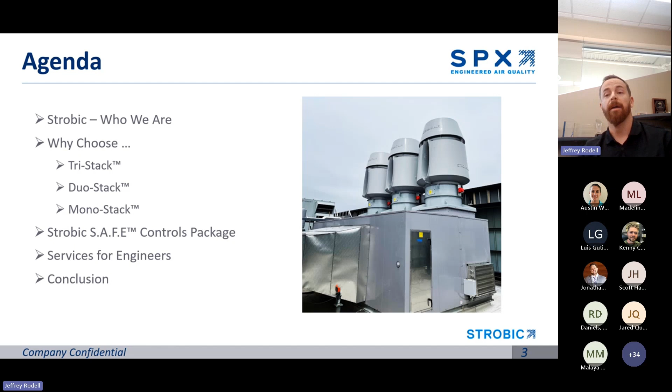Keep it short and sweet, I know it's a coffee break, so I'll give you the download of who we are, why choose either our tri-stack, our duo-stack, or our mono-stack products. I'll go into the S.A.F.E. controller, a lot of value for the controls package for the systems we service and supply. And then finally, service for engineers, advantages for owners, the why, the secret sauce, why we choose Strobic.

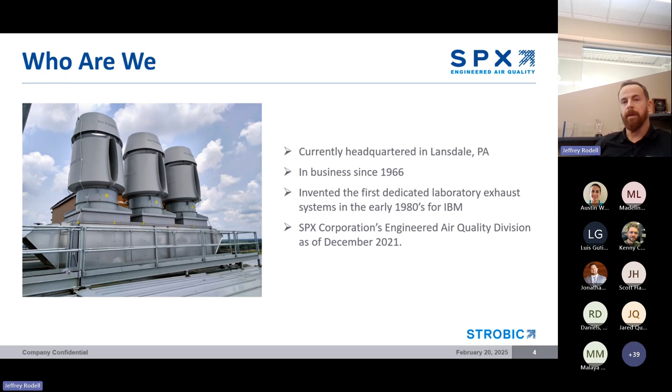So we came into fruition way back in '66, but we really hit our stride in the early 80s in response to an ask from IBM for a dedicated laboratory exhaust system that was first and foremost a life critical safety device, with an emphasis on quality, reliability, longevity, and then finally low maintenance and ease of use. As of 2021, Strobic Air has become part of SPX Corporation's EAM or EAQ segment, and we continue to grow under their leadership.

To echo what I was saying with the tri-stack in response to IBM's ask, these are the things they were looking for. First and foremost is prevent reentrainment of caustic and harmful chemicals from going either back into the facility or into the neighboring facility. Briggs equation tells us it needs to be high dilution in order to maintain an effective stack height that is going to prevent that reentrainment.

Minimal maintenance, 18 month intervals. There's no belts, no direct couplings, we are a true direct drive product. Finally, for the architects, if there are any on the call, low profile - it's visually unobtrusive, requires no guy wires, and it fits into just about any space with our modular construction. So that's to the footprint point.

If you have an application, we can do it. And finally, we have our silencer nozzle you'll see on the left, leading attenuation in the industry, just with the nozzle, with the option to add inline silencers and other attenuation devices.

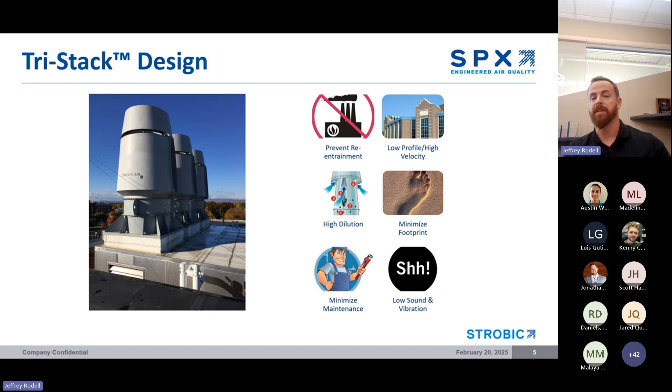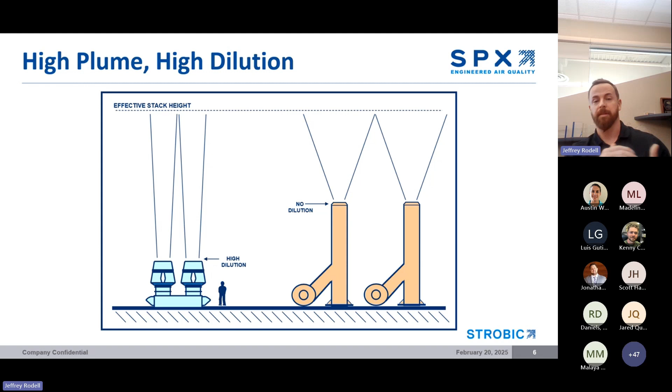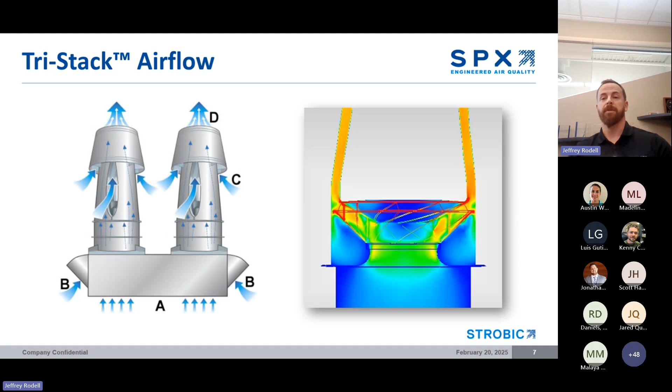Now we're a bifurcated design, and that does a couple of things for us. First and foremost, it takes a large volume of CFM through the inlet bell, through the impeller, condenses that down to meet an acceptable 3,000 plus feet per minute. And second, the engineering of the bifurcated design allows for a smooth, consistent airflow outside of the nozzle.

So again, when we think Strobic, Strobic is the premium quality product. We take our industry standards and we amplify them to a product that's going to last for your 10, 15, 20 years. We do that with FRP nozzles, which are highly chemical and UV resistant. We do that with proper prep of our plenums and metal pieces, with a zinc-free 8 to 10 mil epoxy coating by standard, further coated with a UV resistance that's going to make sure your system's going to last, not just for the 7-year warranty, but well into the future.

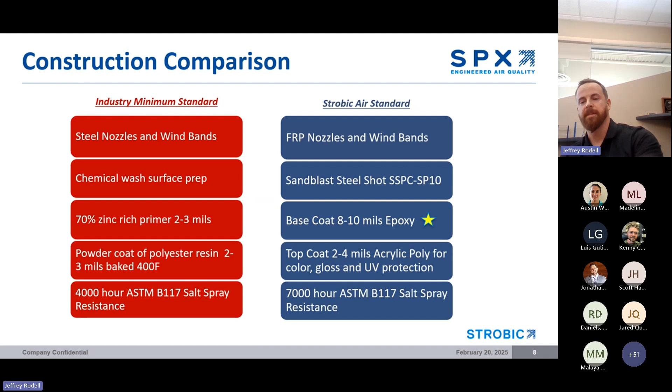And if you're coastal or you have any concerns of salt spray or salt corrosion, we almost double that salt spray rating at a 7,000 hour resistance level. Again, when you think Strobic and we think quality and a premier product that's going to stand the test of time, we offer the only 7-year warranty in the industry. This comes standard on all of our tri-stack systems, so you have the peace of mind and the value that your system is built to last.

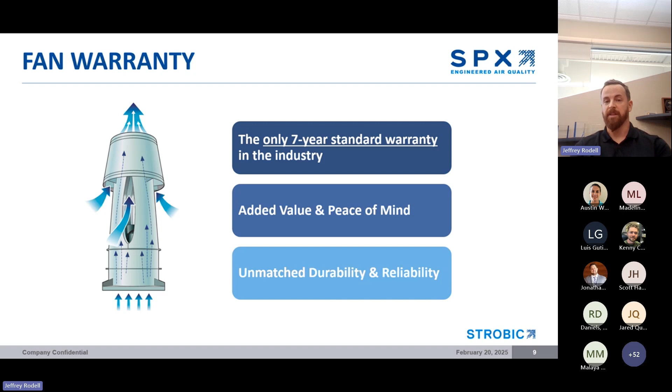Outside of the Tri-Stack, because we understand there are advantageous considerations of a side centrifugal laboratory exhaust fan, we came out with our Duo Stack. The Duo Stack has been out for roughly 3 years, going into 2025. It's a refined push product for us that brings a lot of value to engineers, contractors, and finally the owners.

Duo Stack, for those less mission critical applications, it's going to do very well with high static. It's going to do very well with high temp. If there's a particulate-laden airstream, there's a greatly reduced risk of material buildup. And we get the same quality standards from the Tri-Stack that apply to the Duo Stack as well. So it's a true direct drive, low maintenance configuration with a 3-year standard warranty on this product, upgradable to 5, industry leading in either regard.

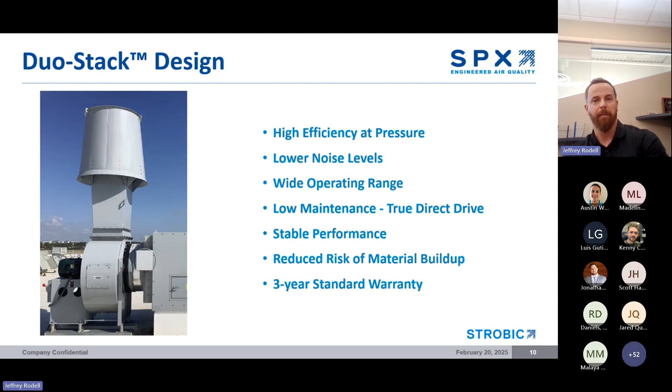The Mono Stack, because we understand there are circumstances where you want the AMCA 210 certified non-induced flow fans, we provide a Mono Stack. It's much akin to the Duo Stack, which based on the induction wind band is an AMCA 260 fan, and provides the same great value of low maintenance, exceptional against high static applications, and a very wide operating range across multiple CFMs.

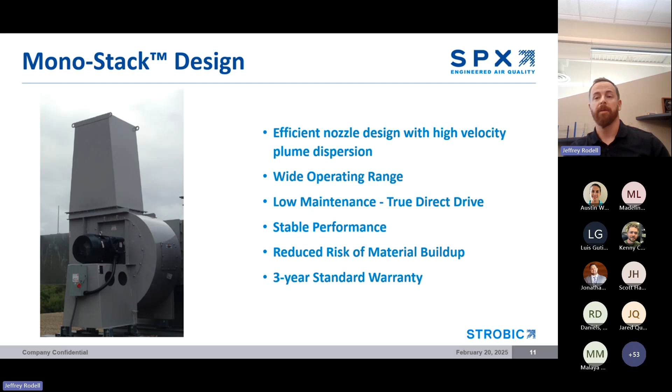So when you're in the field, I've listed a whole bunch of different applications. The best way to think Duo Stack or Mono Stack versus your more mission critical Tri-Stack: mission critical to me means loss of life or loss of revenue. Those are the two considerations that will really steer you into a Tri-Stack. If there is a less mission critical option that's requested or desired on the application, our Duo Stack brings a lot of the same great performance characteristics, the quality, and the longevity at a reduced cost.

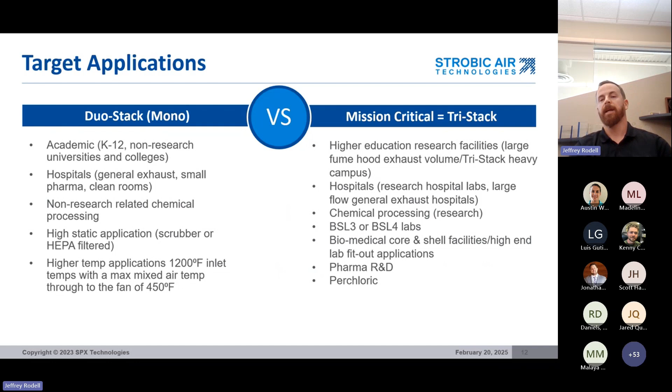Whether it's a Duo Stack, a Mono Stack, or a Tri-Stack, across all of our product lines we're focused on safety first and foremost as a life-critical device. We're focused on ease of use and low maintenance, on durability, reliability, and longevity that will keep your system active for years to come. We're focused on vibration with industry-leading vibration standards that we balance to, Tri-Stack being 0.5 mils peak to peak, Duo Stack being BV3 AMCA standard, upgradable to BV5, industry-leading sound attenuation, and finally, whether it's the Mono, the Duo, or the Tri-Stack, we're going to provide that industry-leading warranty because we stand behind our products.

Outside of the fan system product lines that we have, we also have a Safe controller. This is iteration number 3, which has refined itself into a tremendous amount of value for an out-of-the-box control system. This control system communicates to all the devices on the fan system via Modbus network, and also has the ability to communicate with your BMS systems via IP or MSTP.

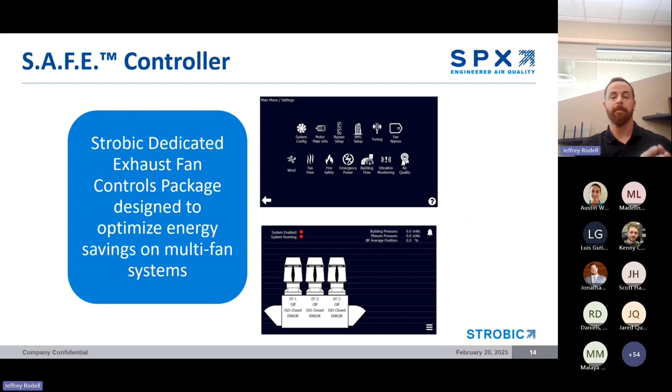The logic of the Safe controller does a few different things for us. Life critical is the name of the game when it comes to a Strobic critical air application, critical air fan. Above all, our Safe controller ensures that we're achieving and maintaining a safe static pressure set point. We're recording flow, and as a secondary function, we look to modulate the speed and the bypass dampers in order to achieve the most efficient operation point.

It'll stage your fans to aid in the longevity of the system. It will detect failures and can activate a redundant fan because, again, the core logic of this controller is safety above all else. And then finally, it can be commanded start-stop pressures via the BMS, and it can communicate back via IP or MSTP to give that end user all of the data points they want to see about their laboratory exhaust system.

Finally, as it's modulating bypass dampers, flow, and speed, it does all the calculations to always ensure that you are maintaining a minimum 3,000-plus feet per minute outlet velocity to ensure the safety of the site.